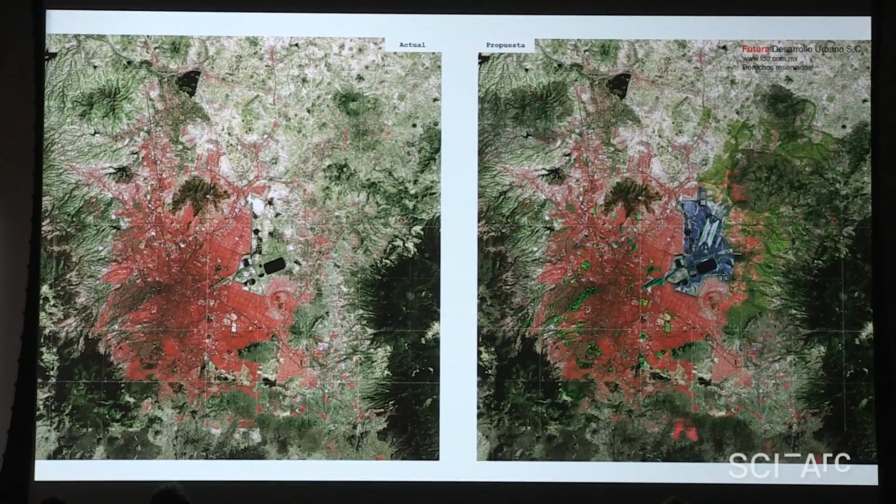But we did this monster, and for 25 years we tried to rescue this area and recover the lake. We knew there was a possibility to build an airport there. The current airport is right in the middle of the city, so we knew it didn't have a chance to grow—twenty years before, we already needed a new airport. So we said, why couldn't we have an airport in the middle of the new, recovered lake?

And I think airports and lakes are compatible because they both need a lot of space, and the terminal construction is very, very small compared to the space the aircraft needs to take off and land.

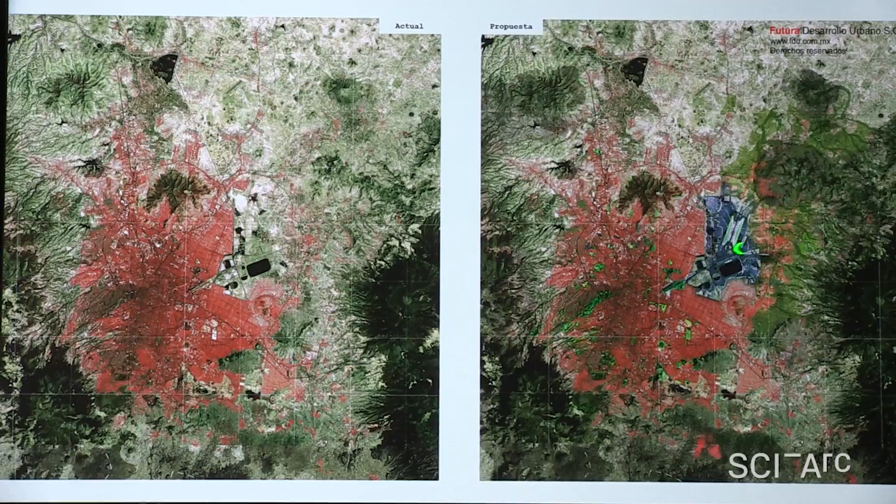So we worked on this project for 20 years. The position of the airport changed from here to there, but the idea of having a big lake and this important infrastructure for the city and the country was the goal. And more important than the airport was the development of the city all around the lake—more than 100 kilometers of organized development around it.

As you know, Latin American cities grow spontaneously with no direction. So this was an opportunity to direct the future development of the city around the big lake, with the airport sitting in the middle of it.

Like two or three years ago, there was a competition for the terminal. Of course, we entered the competition. The competition was a fake competition—the project was given to Sir Norman Foster, who I consider a great architect. But I think to do a good building, you need not only a good architect, but also a good client. And in this case, the client, the Mexican government, as you know, not very well organized and very corrupt, decided to give the project to Norman Foster.

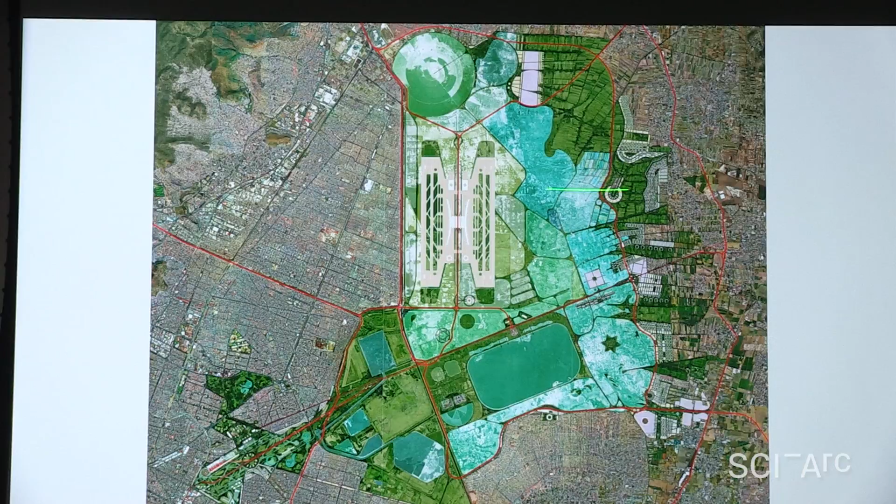So what he's doing, in fact, if you see the Foster scheme, is very similar to this one, with a little difference that this one costs 1/5 of what his terminal is going to cost, and another substantial difference: this thing, which is very simple and rational, can be built in phases, and his project has to be built in the whole in one action.

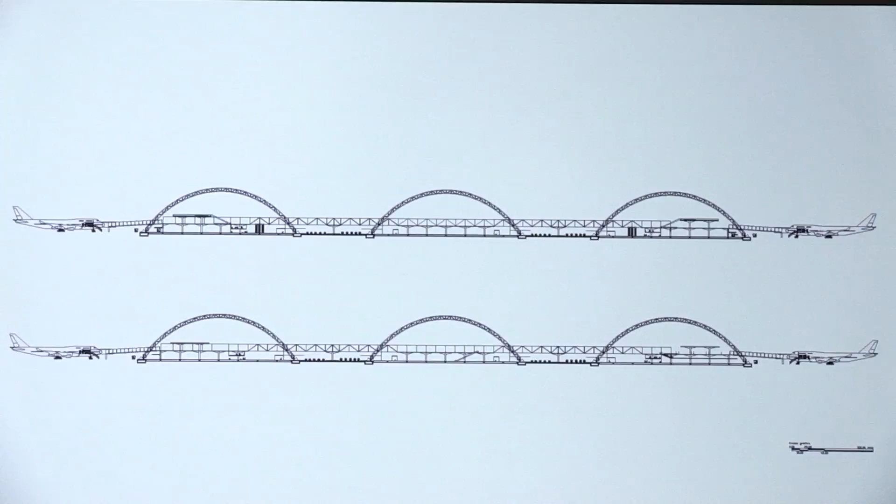When we work with our airport planners, we told them that we needed a low-cost terminal. And we came to this very easy form. Everything is on one level. We have very bad soil in that area of the city, so we said let's do very shallow foundations, very light structures.

And there is an invention here that hasn't been done in any airport in the world. As you remember, in any big airport, the departures have the big roof, the big space in the departure area, but in the arrivals you get underneath, and the arrivals are like the basement of the building, and the big space is in the departures.

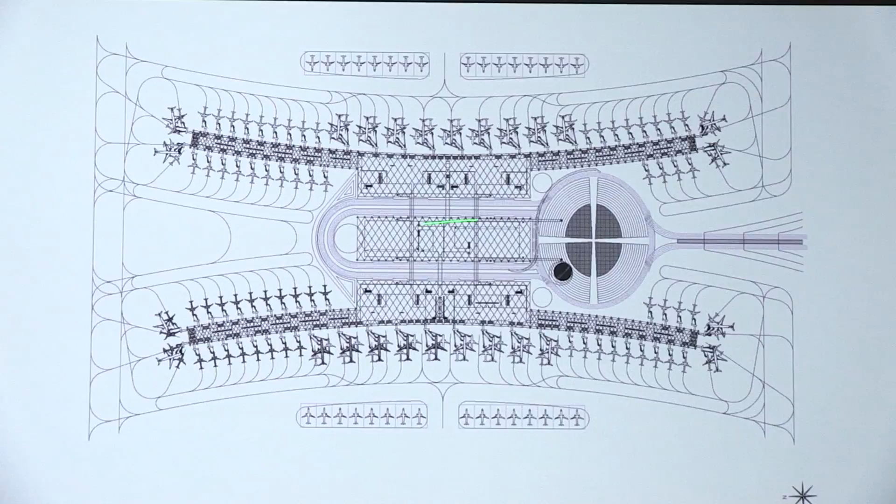So we came to this idea: the departures are, of course, here, the counters and the waiting spaces to go into the airport, into the airplanes. But the arrivals are usually underneath. Here we came with this idea that I still think is very unique and should be built, not by us. The arrivals are also in a fantastic space, but in between the departures at the ground level.

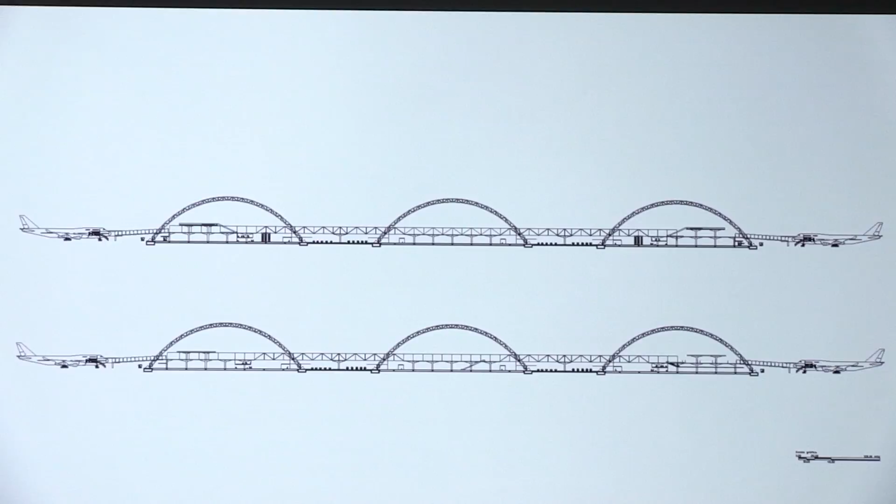So those are the arrivals, and those are the departures, connected with a bridge. When you go out from the airplane, you can cross through a bridge and get to the arrivals, and these are the departures. Very simple scheme, very unique in a way, and of course the possibility of recovering the lake and creating the development or growth of the future city around the lake and the airport.

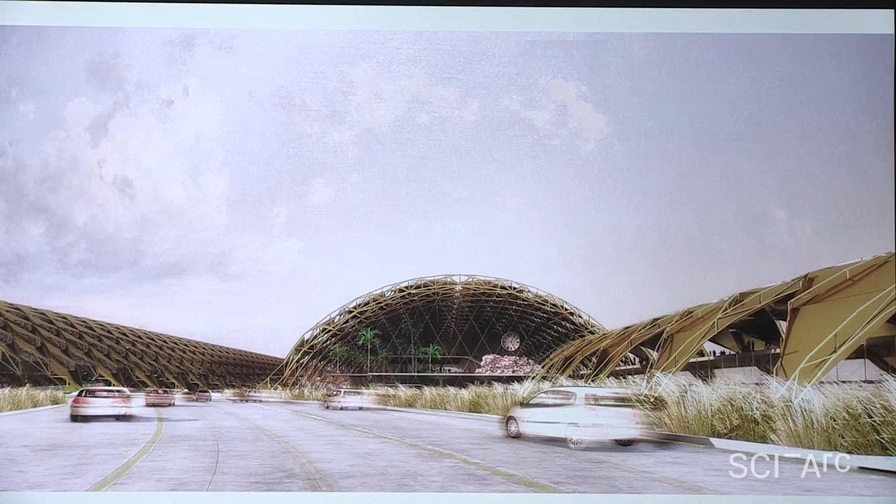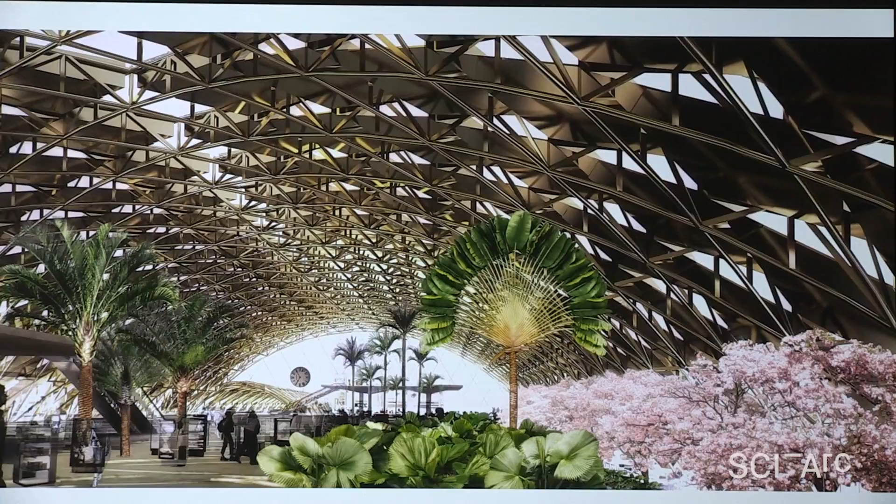So this is a steel structure, a light structure, taking north light, protecting from the south, east, and west. And we thought that since Mexico has this huge diversity of vegetation, we could have the biggest greenhouse in the world, so the airport could be like a fantastic botanical garden with all these species.

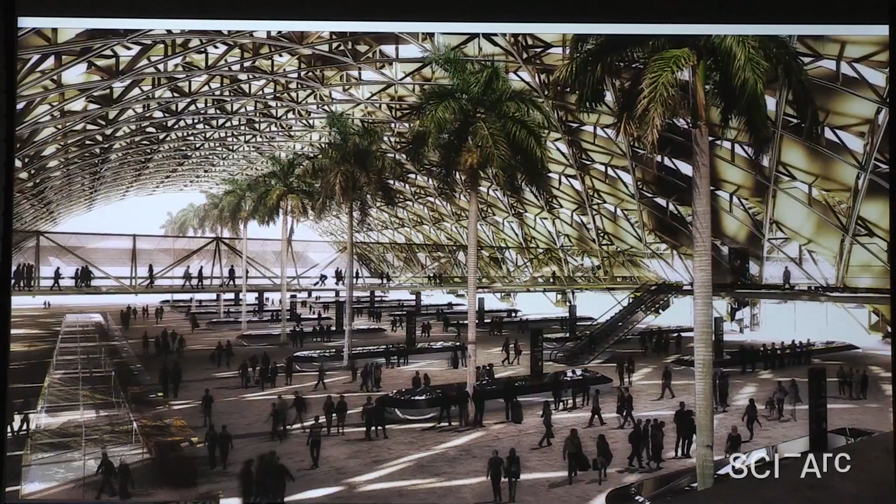And so this is the arrivals. You never have an arrival space like this. Always in all airports, the arrival space is in the basement of the departure space. But here we managed to have this situation.

So, that's another project. Sorry for the discontinuity of the explanation, the presentation. This is the library.

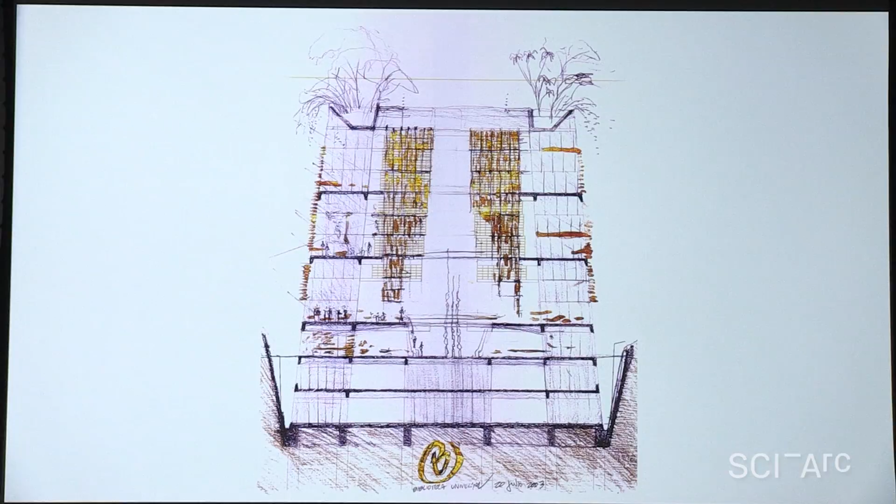Again, it's a section. The library is the main library in Mexico City. That's the actual situation. The site plan is by a railroad station. This was the plot for the library. It was a very narrow and long plot, so naturally the library had to be that way.

We wanted to make a green space around the library because it was in a part of the city where there were no parks, and it was a good opportunity to have a green space for the city. So it was a library and a botanical garden.

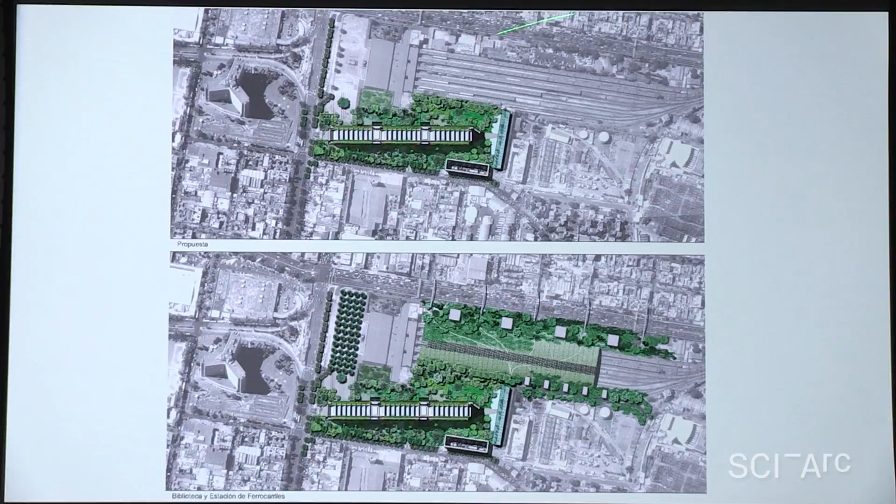What's the initial proposal? Of course, we wanted to extend the gardens on top of the railroads. That never happened, but the building, we managed to build that thing.

It was a building that had to be built in a very short amount of time, so we did a very rational and systematic structure. It's not as long as SCI-Arc, let's say half as long - SCI-Arc is 240 meters long. This one is 36 meters wide. The width was dictated by the most efficient parking lot underneath.

So this structure is surrounded by gardens, and we thought it would be nice to use this idea of the library of the 18th, 19th century of having one space. You remember Boullée, that image of this vault with all the books together. We said we should have a nave, like a cathedral of books. All the books in one space.

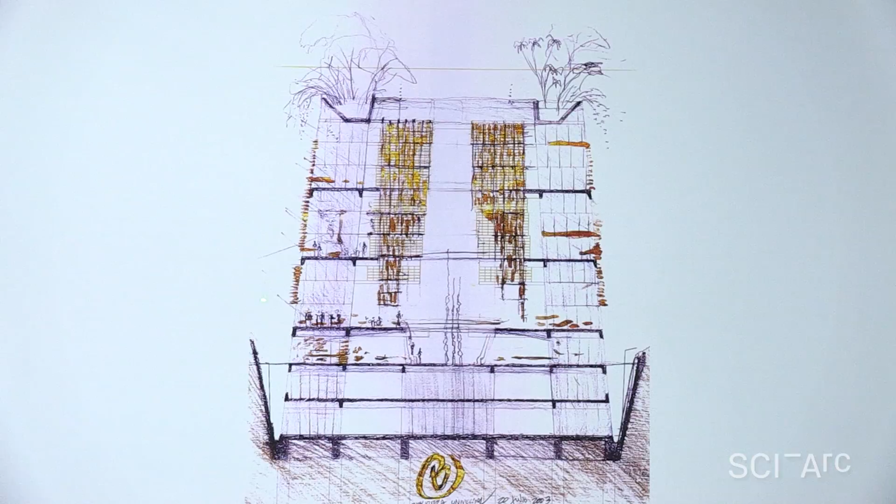The books are the main actor of the movie. So we decided to have this long space with the books all in the main space on the big atrium, as we saw in this section. The books are in the center, and the reading rooms are on the facades looking to the garden. So that was the main idea, and we tried to find a way of doing it fast, easy, and economic. So the section, as you see, is very simple, catching light from the north and light from the east and west facades, protected, with the parking lot underneath.

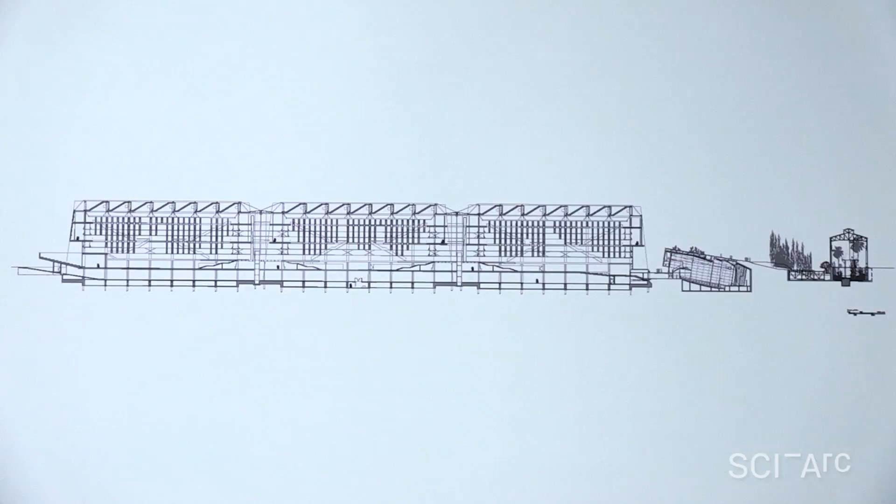So by doing this, we have a very simple scheme, a very simple way of building this systematically. In fact, it was built by different contractors, in a year and two months.

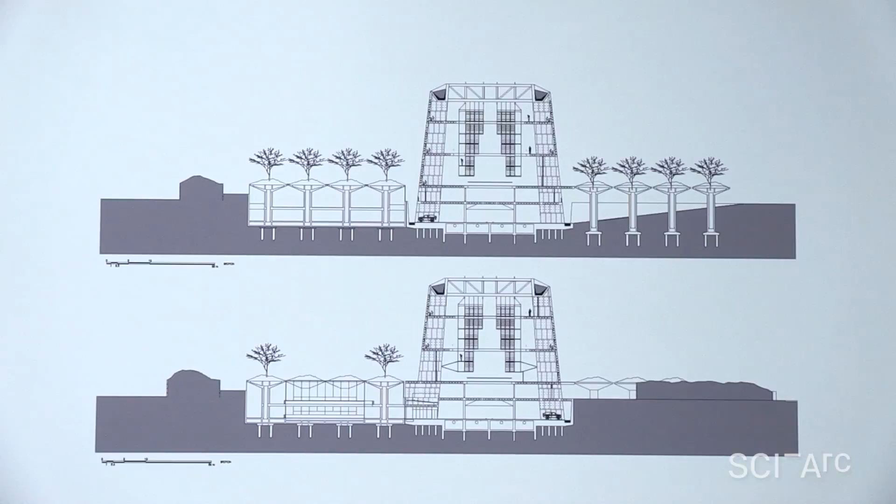This section, and some other facilities of the library like offices and cafeterias, which were not the traditional library, were put aside of the building to have this plain, simple building.

In the program, they asked that the capacity of the storage for books could grow, so we decided to do that like a mechanical piece inside this concrete structure. We decided to put the bookshelves hanging in the center of the space, like a meccano that could be added with more and more storage.

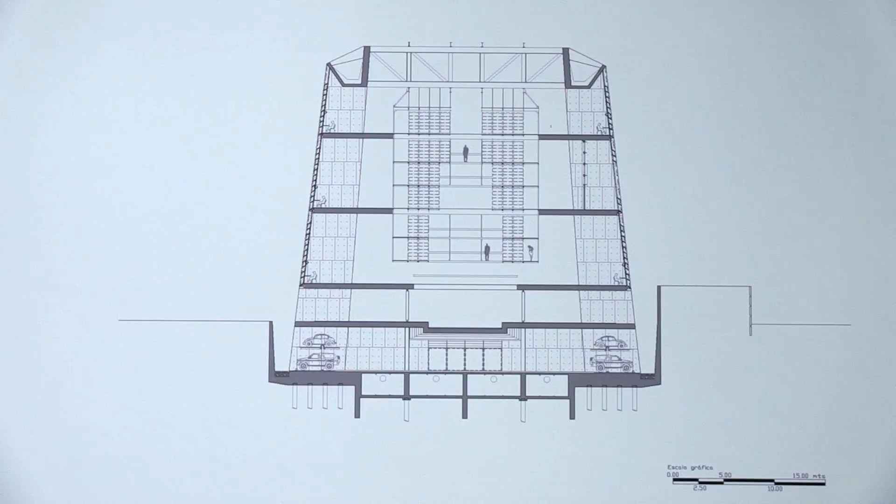The fact is that every day they steal the books, so every day there are fewer books instead of more. Part of the idea was that they could steal the books, but the other part, that never happened, is that the books have to be replaced, but they don't replace them.

So this is a little bit the context. The context is Mexico City: chaotic, dynamic, with a lot of life. The entrance plaza has a lot of trees that, in a way, announce the garden which is around.

When you enter, there is a little patio with this hanging structure that we designed. These are like telephone wood posts floating in that space.

Since I was a student, I was very impressed by this tensegrity structure, so we wanted to do this. It doesn't exist anymore because a director of the library decided it was a little bit dangerous to have those posts floating in the patio, so he put them away.

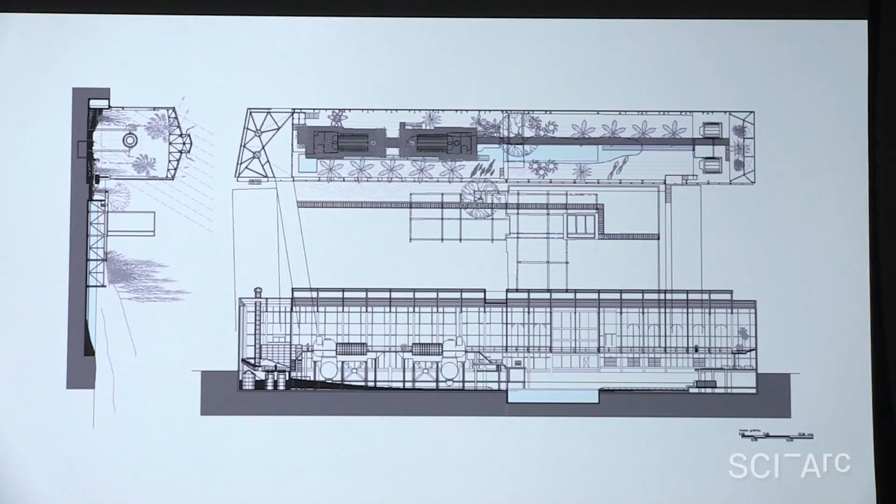It's still abandoned. After 10 years, they haven't opened it to the public. We did it against the will of the client, but it's still there. That's beautiful about nature, about plants - they grow even though you don't want them to. They wanted to cancel this, but it's growing on its own.

And you see the turbines and the cranes, and I think this is the best part of the library.

Very close to the library, we did an apartment building for a construction company. The construction company was the developer of the project, so we needed to win the competition. We knew that the jury were engineers, only engineers, so we designed a building for engineers - very rational, very simple.

Nothing new - it's a high-rise, so the facade is the structure, the facade and the elevator core, with apartments to one side, apartments to the other, and the core at the center.

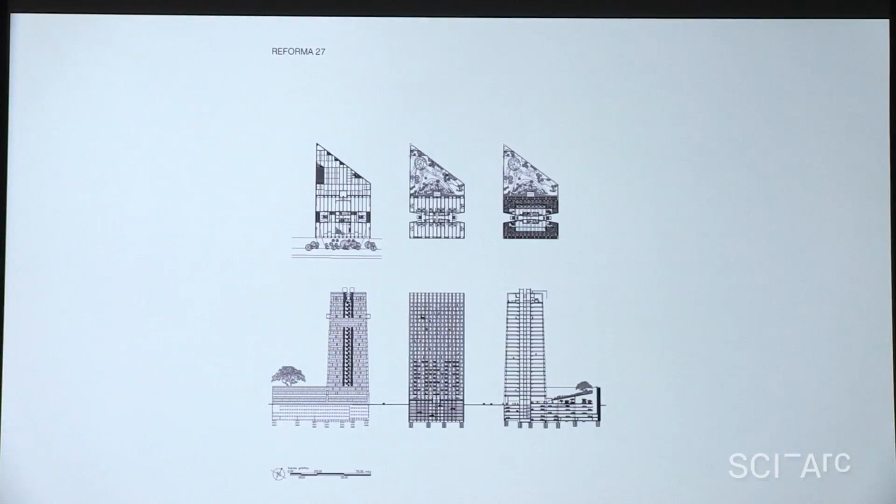Probably we managed to have a natural light in the central core. That's nice. From here you have a staircase and elevators at the center, but you get to have a very nice natural light at the center.

We did a very classical building with a portico to the avenue, the main avenue in Mexico City. So there's a portico before entering the lobby, a public space responding to the main avenue of the city.

The lobby, which doesn't exist anymore, a new interior designer changed it.

A garden on top of the garage, on top of the parking space, which, any piece of green space that we could win for the city, we think is positive. So this is on top of the garage. It's not a green roof, it's a park on top of the roof. That can be done.

The building is interesting because you can have an apartment with one window, two windows, or three windows, depending on your budget. So it was a free plan, the facade as the structure, which gives you the possibility of expanding or having different types of apartments.

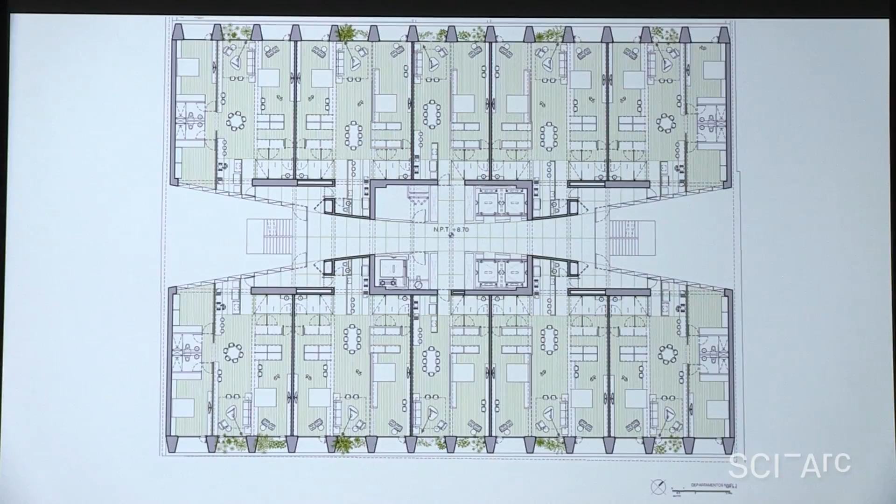But I think that a very simple building could have interesting spaces. So everything is movable. Everything is light divisions for these spaces.

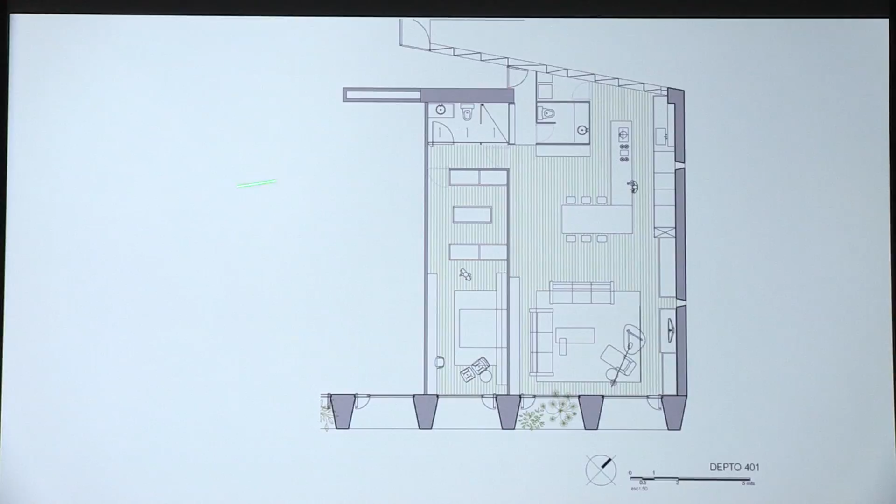Here you still can see the structural elements and the divisions. Everything is perfectly divided, and the concentration of pipes and drainage back there.

And what I was talking about, the central core of the building has natural light and ventilation, which I think is something that doesn't always happen and is desirable to have natural light in the central core of the building.

And at the rooftop, we have another, let's say, roof garden, which is here. Here you see the organization, and by this slight shift you can get a lot of light and ventilation at the central core, and the gardens on the rooftop, a big swimming pool, 25 meters long.

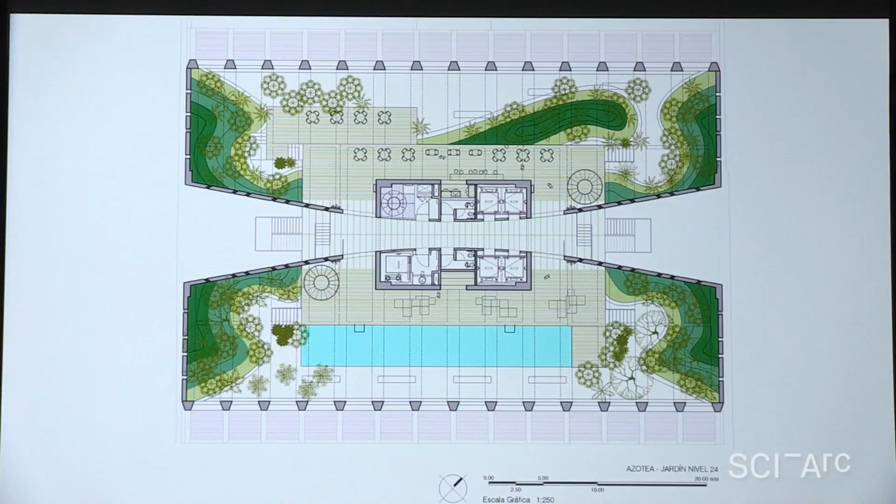And the possibility of making out of the roof one more space for the tenants, and a gym, and fantastic views to the city.

Okay, I'm going to change to a much smaller building. This is somewhere around here, a small building, I don't know where. I got lost. There.

It's right there, in front of the most important park of the city, Chapultepec Park. So it's one of the first buildings on this edge of the park.

It's a very small plot, 250 square meters. The size of the plot and the size of the plan is like 160 meters.

Of course, in a very small, constricted site, the plan responds a little bit to the geometry of the site. So we try to rationalize this strange figure into a more regular figure.

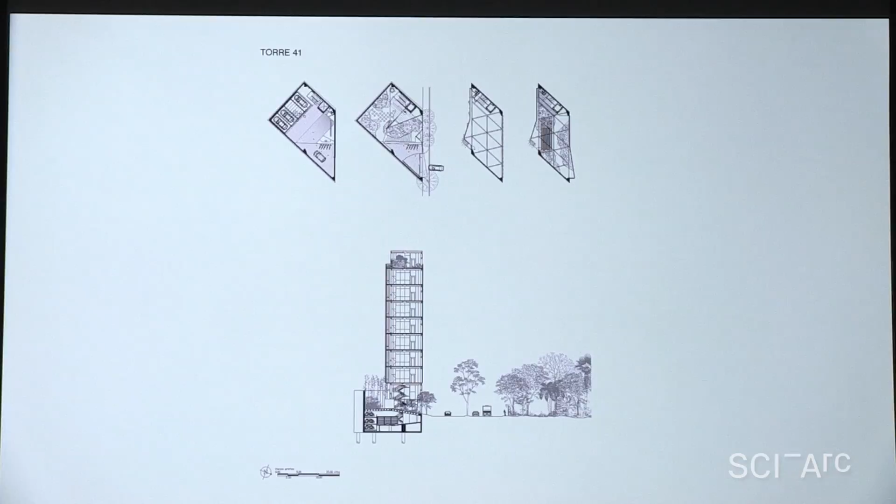We work with the geometry. The geometry is very important. Architects should know geometry. I shouldn't say that here in SCI-Arc, but you know what I'm talking about.

So we did this very simple building that stands on the edges of the site, with two structural walls that not only carry all the loads of the building, but also protect it from east and west, and open up the views to the park to the north and south, to catch some sun from the south, which is very beneficial in winter.

And the structure is the theme of the building. As you can see, the structure is not only the structure, but is the architecture. It's the entrance. The entrance is once again a garden, and the building is up there.

Of course, the building has natural light and ventilation. I'm sure that in Los Angeles or in Mexico City, probably you don't need air conditioning all year long. Probably very few days you need air conditioning or heating. If the building is well designed and takes care of the orientation, you don't need mechanical instruments to have pleasant weather.

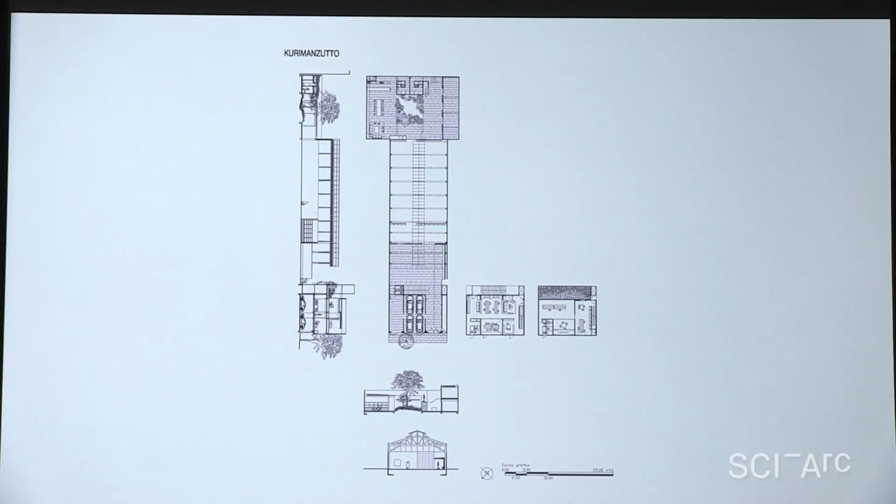Okay, this is another project, an art gallery. It was a warehouse existing in the same neighborhood. It was, even though this structure is more common to see in California, a very strange structure in Mexico City.

So even though the structure was collapsing, we decided to redo the structure with some minor changes. We put some reinforcement. We opened a skylight because it was a gallery, not a warehouse. Originally, it was a warehouse.

And we put some greenery, and we did some minor interventions. We added a stair. We put hanging gardens there, a connection here. So this is, let's say, a transformation, or we recycle a building, and that's something that we like.

Day by day, when I started working as an architect, I didn't like to remodel things. I wanted to start from scratch, but I enjoy now transforming things. I think there is a challenge, and it's very, very exciting to transform an ugly place into something not so ugly.

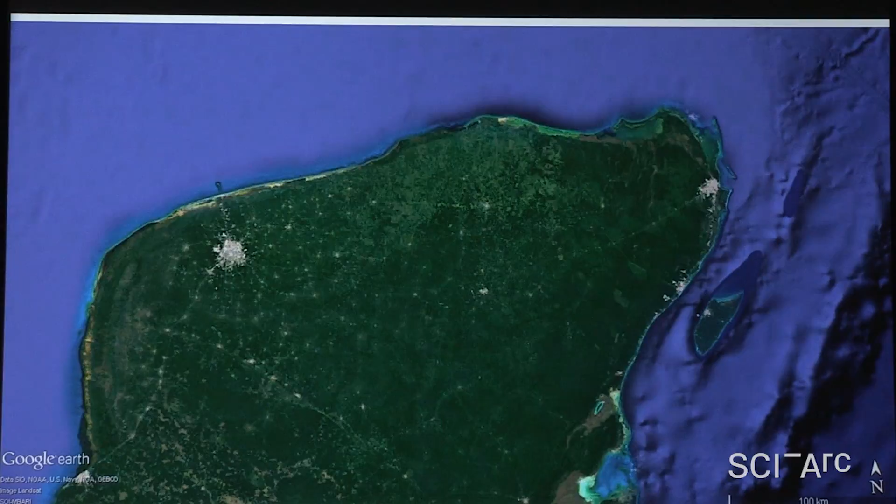Well, here is the peninsula of Yucatan, in the Caribbean Sea, Gulf of Mexico here. Here is another project which is close to that town. It's in this little hacienda, a very little building in the middle of the jungle.

Extinct jungle, I should say. This was a heavy jungle that was completely deforested a long time ago. We were asked to adapt an existing early 19th century hacienda, which is a tiny little building there, and another little building there, and the rest were like divisions for agriculture and animals, bullpens.

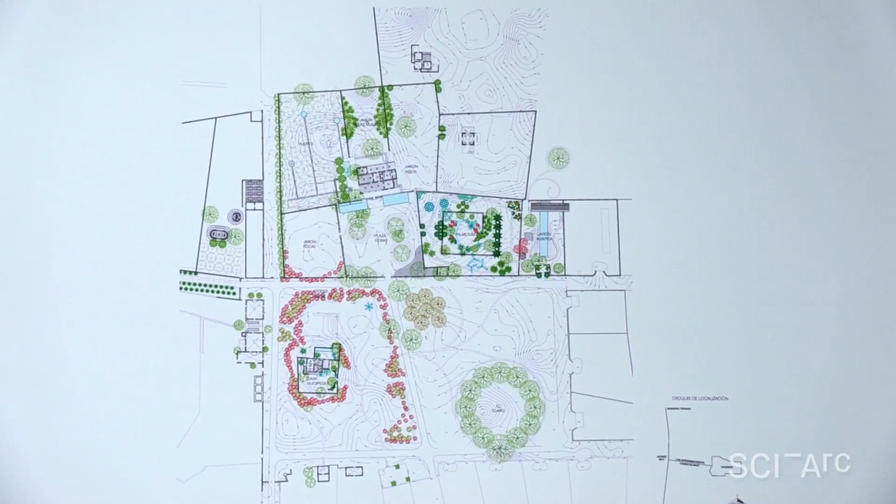So what we wanted to restore, first, was to restore nature, preserve the existing walls. Those are existing, but the vegetation came after. Many of the vegetation came after. There were few huge trees.

That's the early 19th century hacienda, a very small building, like 200 square meters. But the building in itself is a fantastic lesson of how to adapt to a climate. It's high ceilings, protected from direct sunlight, and with cross ventilation.

And this is a place where you get to 40 degrees Celsius, and still the building is comfortable without air conditioning. There's no air conditioning. There are 40 degrees Celsius outside, but inside you are in a reasonable, comfortable space.

We added some ponds. There were some water fixtures existing, and of course, all the vegetation that is restored. There was none of this vegetation in the place. Everything is done. It's like a miracle that all these plants we brought in, the way that things grow there is amazing.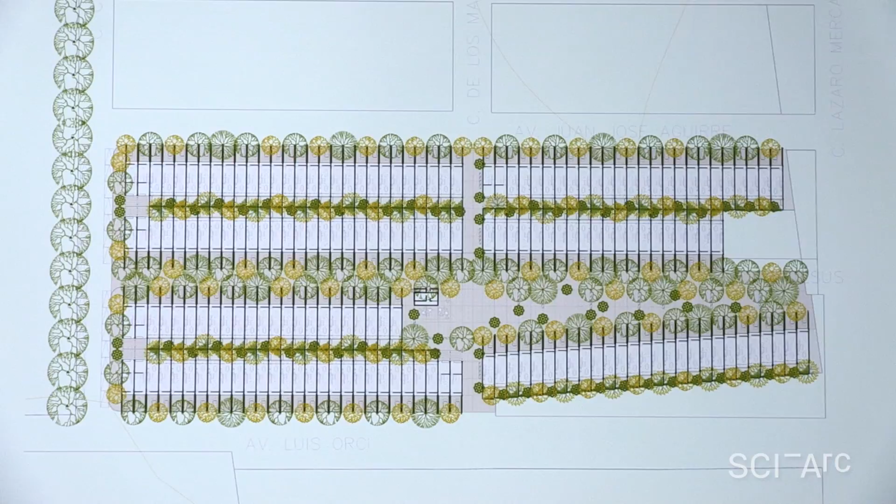So here we see the houses. It's not an invention, it's a very simple house, but we did generous high ceilings. And in order to break the circulation inside the house and have a continuous, flowing space, we did intermediate levels, cross ventilation, very important, green roofs, very important, and big trees.

I think this is in the northern part of Mexico, in Hermosillo. It's desert, very warm, very harsh weather. But the success was to do narrow streets and profuse vegetation, big trees, instead of wasting money on wide streets, to create shade and a better ambience.

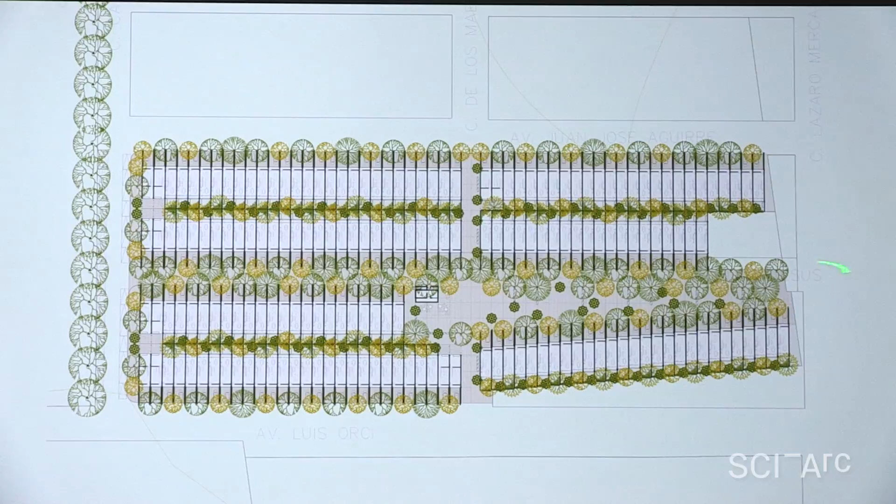And there are these, the doors of the rooms are... the whole house is 350 wide, so the doors to open or close the bedrooms are half the width of the property. And also by switching the section—I'm going to go back, sorry.

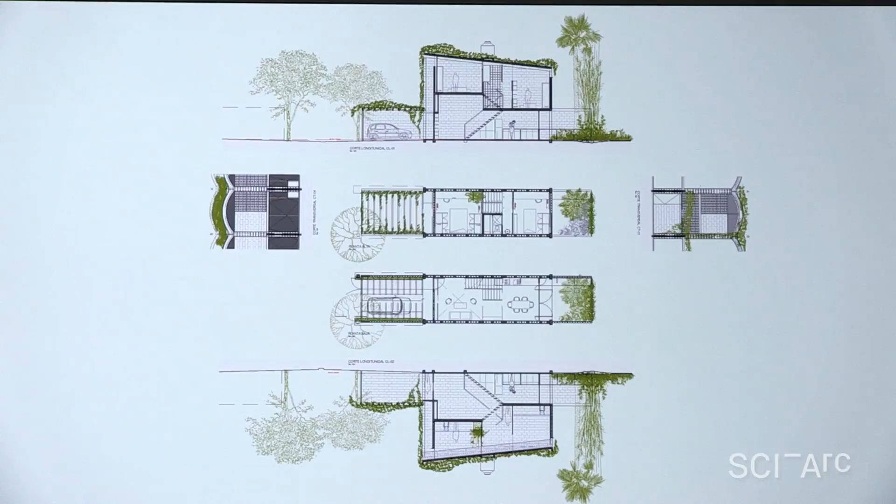Here you enter through, let's say, half through the high area, but if you switch the house, you will enter through the back part, so you can have a profile that changes and makes the street less monotonous. Of course, the developer didn't do that—he only did the same all the way around.

Okay, I'm not expressing myself very well, right? But we are about to finish. This, we did a little piece here.

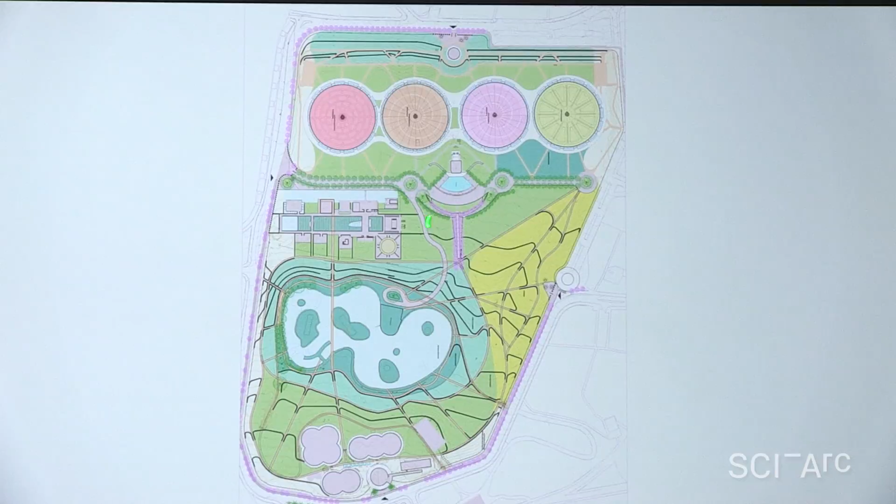I saw it once from an aerial photograph and said, that's amazing. But nobody could see it, and this ended up being a parking lot for buses. So this whole area was a parking lot.

So I said, my God, we should rescue this because the fountain is so fantastic. So we did all the gardening around, and we did this solid earth pyramid. Let's say this is the first 21st century pyramid in the world, because there is nothing underneath, because we have seen other pyramids with functions underneath. But here we said, no, only let's store earth, which is very cheap, to push earth there, create a pyramid, and from the top of the pyramid, we can see the fountain that nobody saw before.

That's it, we create this axis to be able to play with the topography of the land, which was very soft. We could change the levels to see, and we recreate a garden that needs no gardeners, a very natural garden with some facilities underneath, and ventilation. Well, and this is another project, sorry for changing like that.

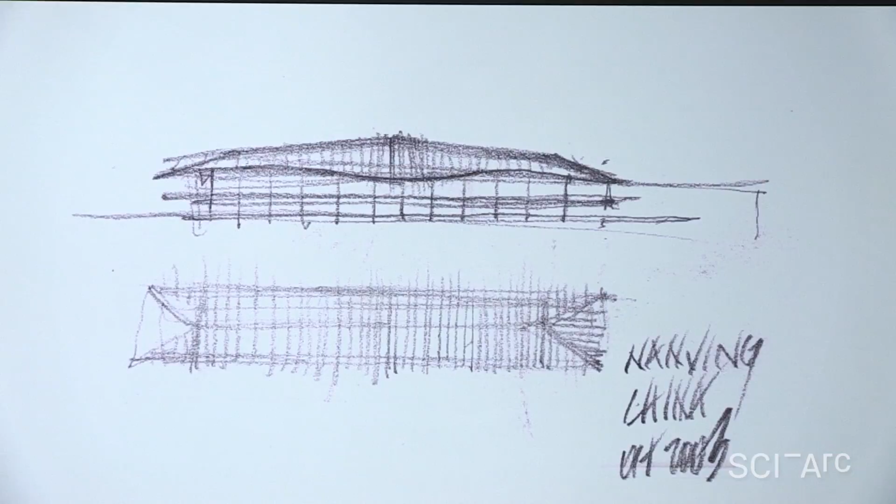We did this in China. It's a structure, it was a house in China. We wanted to do a Chinese house because we were impressed by China, and they were losing their traditions. We did this like 10, 12 years ago. So we did this wood structure with a Chinese look, with Chinese tiles on the roof, all built on wood, on top of a rice field.

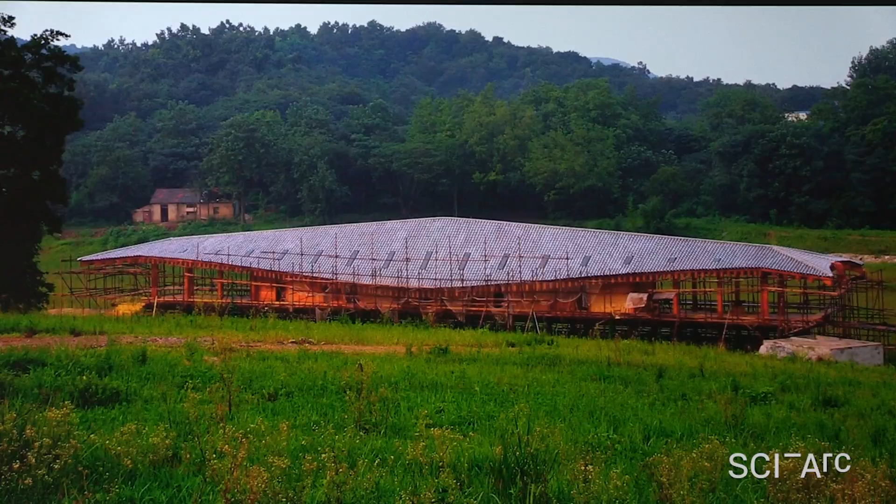This was going to be floating on top of the rice field. Our plot was into the forest, but we didn't want to knock down trees, so we moved the building into the rice field. So it's like a ship floating in the field. Everything is out of wood. A very simple structure.

By shifting the straight wood elements, everything is done with, if we go back here, you see the section, by shifting the angle of each beam, you get this more organic shape that reminds the pagoda somehow. And by doing that, we can have very open spaces and more shaded spaces. By moving, if you see the plan is exactly the same, but by moving the roof, you have more intimate spaces and more public spaces on the tips.

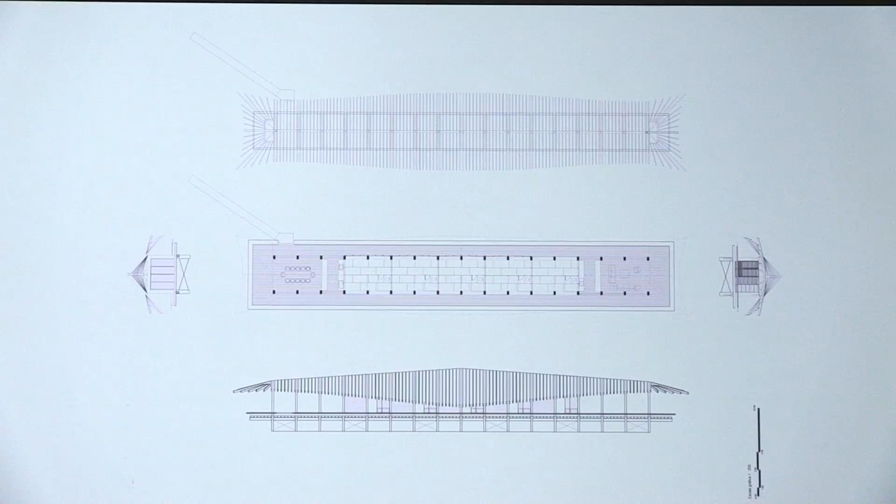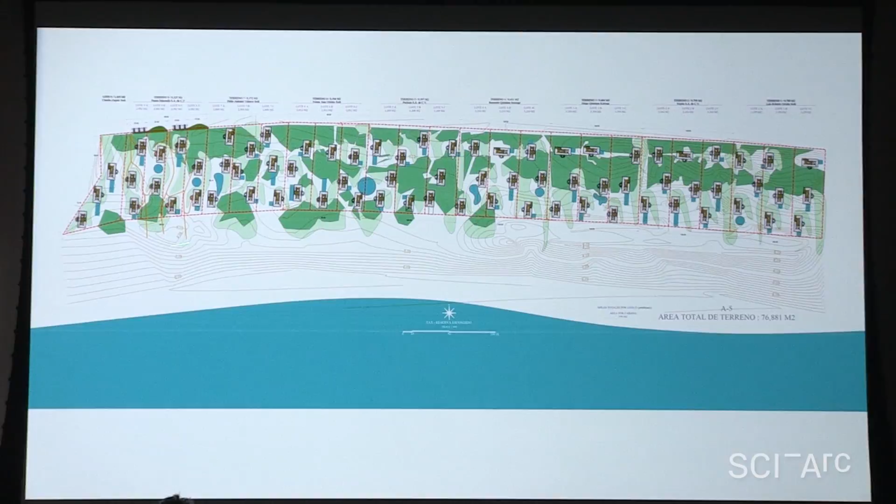And to end, I'm going to show you small houses in front of the Pacific Ocean. It's completely all built in wood, which is very simple, 8 columns and a roof. And that is the whole house. Let's say these houses were built, each house is built in 2 months, 2 months of construction, and then you have a house in front of the ocean.

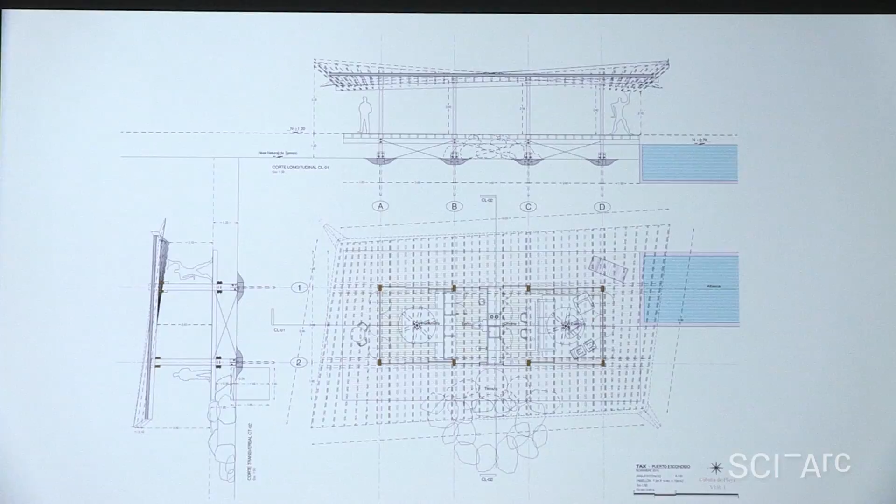There is a little twist on the roof. It's a flat roof, but with a twist, like when you put that piece of lemon on your gin and tonic. It has a twist, and that twist makes the difference, because it has character, and it also helps drain the roof, instead of doing all these difficult things to drain it.

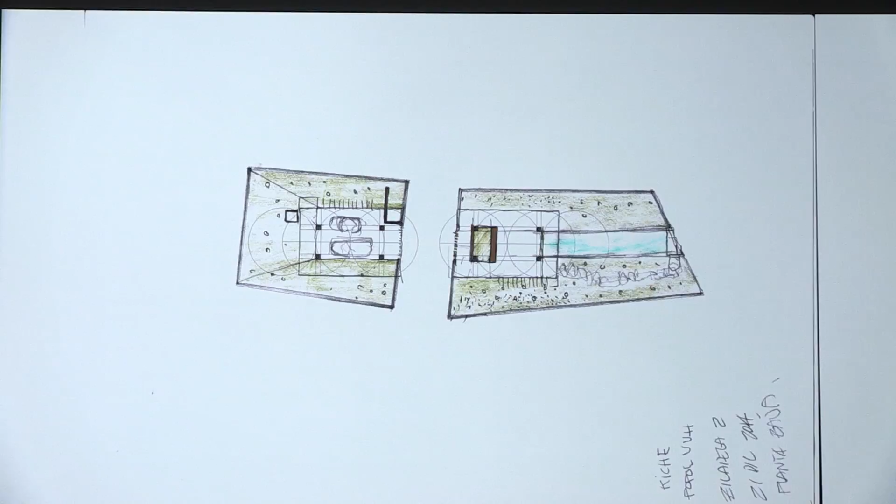So that's the plan: 4 columns and a slab, 4 columns and a slab. Staircases—we switch the staircases to make it less monotonous, but it's very simple. So it's our version of the Domino House.

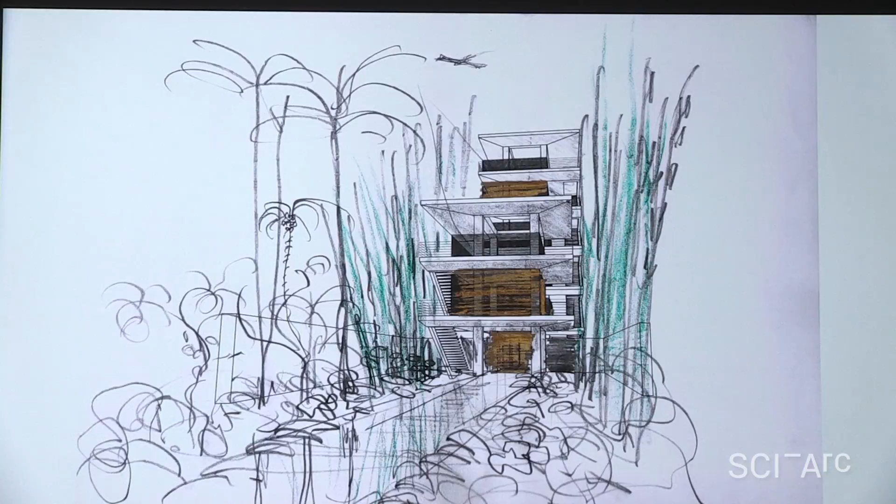That's a little sketch. This is something we were talking about today, that now you can sketch on top of very basic computer drawings. That's very dynamic—you can move very fast.

The size, I think the proportions are important, how you shape the thing. It's very different to have 1 meter or 2 meters of overhang—hangover? No, overhang. Well, how do you say it, hangover or overhang? Or none of them work.